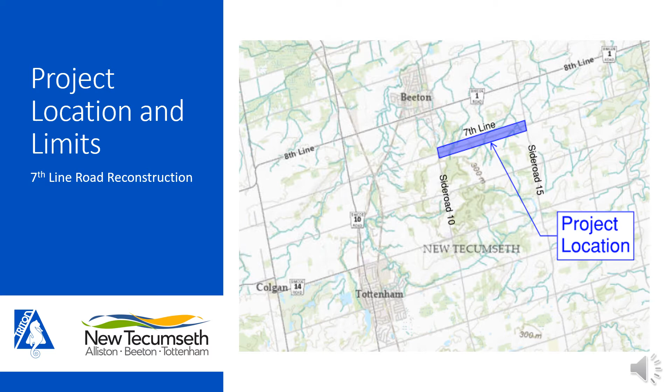7th Line from Side Road 10 to Side Road 15 is a 2-lane rural paved road with a posted speed limit of 60 kilometers an hour and 70 kilometers an hour. The 60 kilometer an hour posted speed limit is a 700 meter long section starting approximately 300 meters east of Side Road 10. The road has been identified as a minor collector road in the town's official plan.

The existing average annual daily traffic is approximately 1,800 vehicles per day, with 1.4% of those being heavy trucks. It is expected that the percentage of heavy trucks would be higher between Side Road 10 and the town's work yard, as this is their primary route.

The road surface is in a deteriorated condition, and the town of New Tecumseh's 2018 Road Needs Study Update, completed by R.J. Burnside and Associates Limited, has identified the section of 7th Line from Side Road 10 to Side Road 15 as a high priority for road improvements, including a need for reconstruction of the structural base. The link to the Road Needs Study is included on this slide.

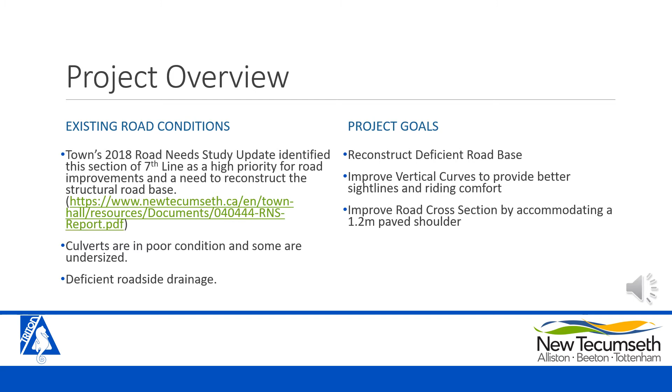As part of this project, the town's goals include reconstructing the road, improving the vertical curves to meet design standards, and improving the roadside ditches and road cross-section. The objective of the profile design was to improve the vertical curves to the design standards while keeping the grading limits within the existing municipal right-of-way where possible. This approach minimized negative effects to private property and entrance grades, and minimized conflicts with existing utility infrastructure.

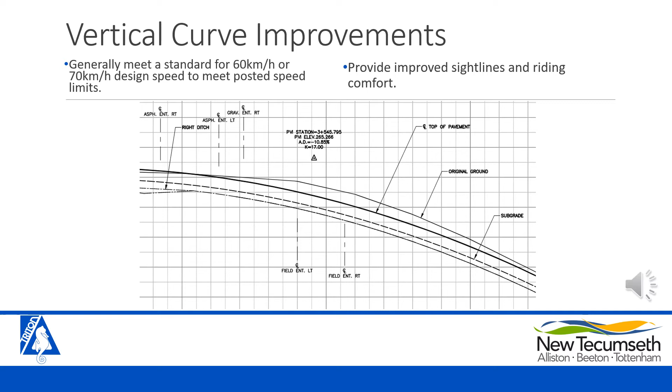The proposed profile generally meets the design standard for the posted speed limits of 60 kilometers an hour or 70 kilometers an hour. In making the improvements to the profile, consideration was given to impacts to private property, environmental concerns, and construction costs. On the design drawings, the darker line represents the proposed profile and the lighter line is the existing profile. Both are labeled on each plan, with the proposed profile showing additional design information, including the grade and curve information. As an example, the proposed profile will be lowered by approximately 0.75 meters at the location shown on this slide in order to meet the design standard.

The existing road platform has an average asphalt width of 7.1 meters with a 0.6 meter gravel shoulder on each side. The proposed road section will follow the town standard for a 20 meter right-of-way, which will include a 3.5 meter lane in each direction and a 1.2 meter fully paved shoulder on each side. A fully paved shoulder adds value to the road, reduces the maintenance costs, and provides additional pavement width for cyclists and pedestrians, and will also provide extra pavement width for vehicles to pass large oncoming farm machinery.

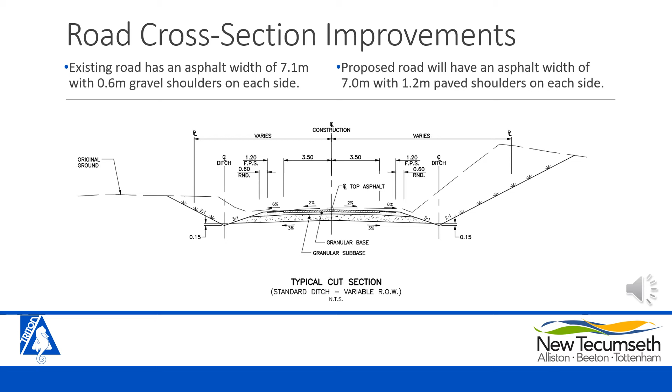Drainage will be provided by the new roadside ditches and flow to the existing outlets. The typical section shown on the slide illustrates the new road in an area of cut. Additional typical sections are included on the design drawings.

Each entrance was carefully reviewed and considered during the vertical profile design. If the road profile changes were causing too steep of an entrance grade, the profile was revised to alleviate the issue. Due to the improved profile and the wider road platform, many entrance grades had to be adjusted from existing conditions in order to tie into the existing entrance at property line.

Where it was not possible to tie in at property line without increasing the grade above the town maximum standard of 7%, the entrance grading was taken beyond property line. In some cases where the grade exceeds 7%, efforts were made to minimize the grade change from existing conditions where feasible. The design drawings include a section at each entrance affected by the construction.

The section shows a new platform in a thicker solid line and the existing in a thinner dashed line. It also includes labels for the center line of the road, new edge of shoulder, and property line to illustrate the vertical changes that the improved profile will result in. The new entrance grade is in black, while the existing entrance is in gray.

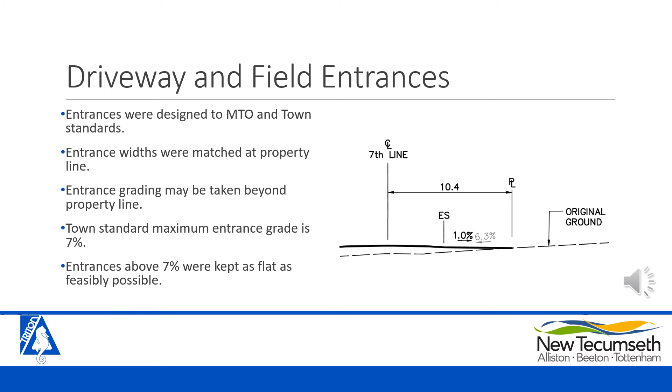The design drawings posted also show a plan view of each entrance and include color to illustrate what material will be placed for each entrance. Gray is used for asphalt, tan is used for gravel, and pink is used for concrete and concrete pavers. All residential entrances will be paved with asphalt within the town's right-of-way with an improved 5-meter turning radius.

If an entrance requires grading beyond property line, the material placed beyond property line will match the existing material of the entrance. All field entrances will be gravel from the back of the edge of shoulder. All existing entrance culverts will also be replaced with new.

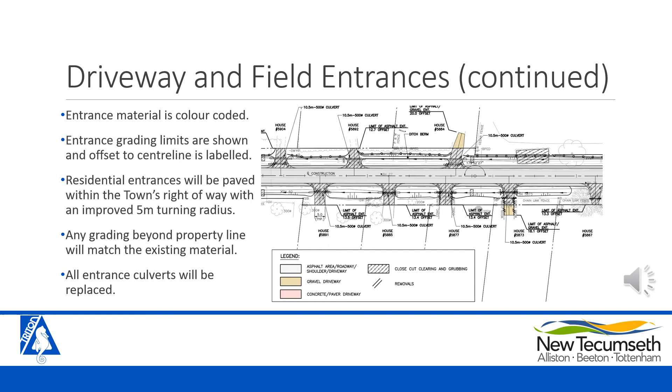The drawings also show the limit of grading for each entrance with an offset from the center line of the road. Any residents with grading on their property should have received a letter with a consent to grade. If the drawings are showing that the work is encroaching onto your property and you did not receive a letter, please contact us as soon as possible.

All existing culverts will be replaced, including the 2 concrete structures, 7 road crossing culverts, and all entrance culverts. The concrete structures will be replaced by precast box culverts. All road crossing culverts have been modeled and sized in accordance with Town and Nottawasaga Valley Conservation Authority standards. A permit for the proposed work has been obtained from the NVCA.

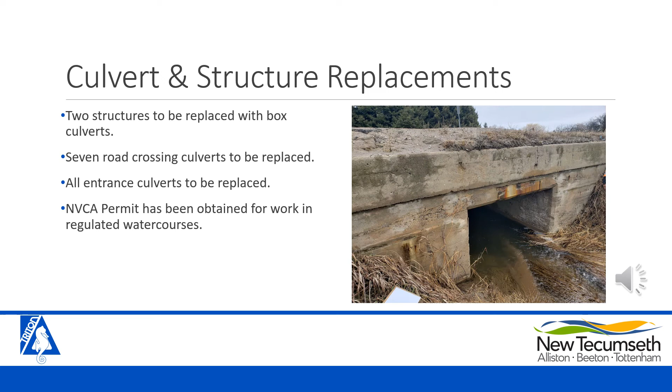A detailed inventory and arborist report was completed for all trees that are 100 millimeters diameter at breast height or larger within the project limits and 6 meters of the right-of-way. Each tree was reviewed to determine if the proposed design and grading limits were in conflict with the tree's protection zone. Each tree in conflict was reviewed further to see if it had to be removed or if it could remain with tree protection fencing being installed around it during construction.

The town will also have an arborist on standby for trees that are designated to remain and are close to the grading to ensure that construction activities do not harm the tree. Tree removal locations are included on the posted tree inventory and preservation plans. The trees designated for removal are highlighted on the plans with colors to indicate if the tree is within the municipal right-of-way or on private property.

Tree removals are currently underway and expected to be completed before construction and the migratory bird nesting season begins. Some trees will be replanted within the town's right-of-way with approved species for the local area that will ensure the best opportunity for their growth. Private trees will be replanted as discussed with landowners.

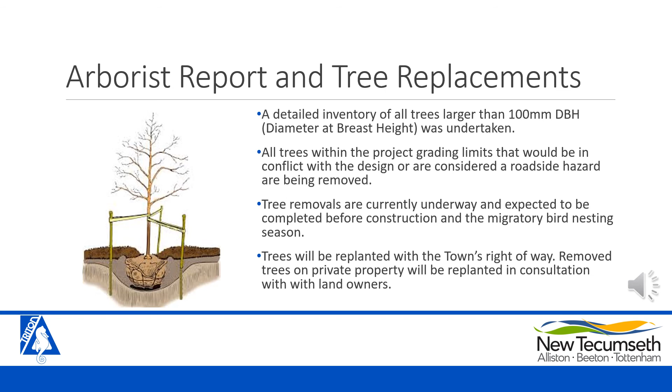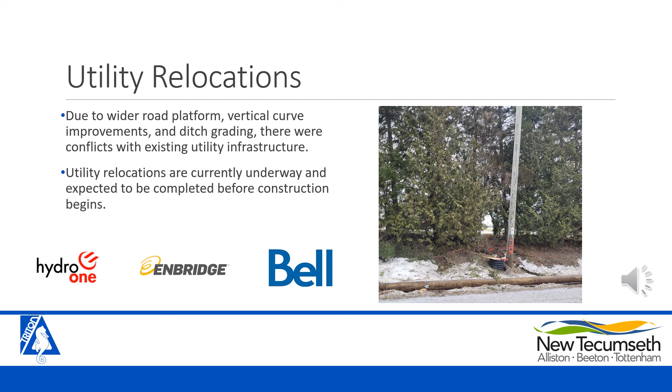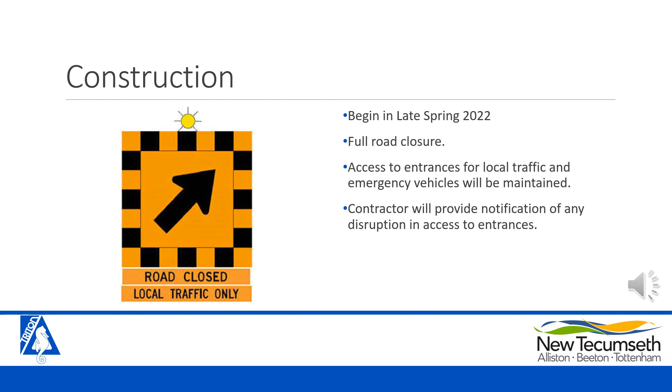Access to your entrance will be disrupted when the contractor is installing the new entrance culverts, constructing the new entrance, and excavating the new road in front of your entrance. These disruptions are expected to be only for a few hours, and the contractor will notify you beforehand to make arrangements for anyone that needs access. The contractor will set up a detour for the road closure. A detour plan showing the route is included in the design drawings posted.

Simcoe County waste collection will be maintained throughout the duration of construction. We ask residents to continue to have their carts put at the end of their entrance by 7 a.m. in order for the contractor to pick up and move the carts to a designated location outside the construction limits for the county to collect. The contractor will return the carts at the end of the day, so we ask all residents to ensure their carts are clearly marked with their address.

The impacts of the construction to the school bus route are being coordinated with the School Board Transportation Consortium. Additional details will be provided to residents. Mailboxes will be relocated outside the construction limits to a designated location for the duration of construction. At the outset of construction, the contractor will relocate the mailboxes and then reinstall them on a new post after construction has been completed and the road is opened up. Residents will be notified of the details subject to coordination with Canada Post.

The next steps of the project include preparing for construction. We will review all comments and questions submitted through this open house process and then finalize all contract documents for the contractors to bid on the project. It is expected the project will be awarded in late spring and construction will begin shortly afterwards.